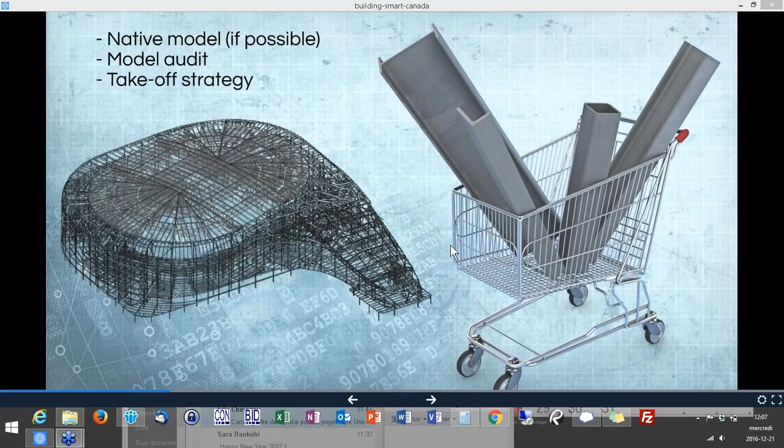Let's continue. So in sales and estimation, whenever it's possible, we like to receive a model from the engineering firm that has worked on the design. And what do we do with these models?

First, we do a model audit. Is this model good enough for estimating? Is this model good enough to start working on the job? We have prepared an algorithm that we use to define the quality of the model, because every engineering firm has different degrees of competency using those models. So we can't just close our eyes and say, well, we're going to use it anyway.

So once this is done and we realize that the model can be used, we are able to make a quick takeoff directly from the Revit model or the Bentley model, or whatever software was used to create the model. The goal is to go through the model and make a purchase of material as fast as we can.

On this specific project, the Ice District Arena, the design wasn't complete, and the opening date for stadiums and arenas, our ecosystem where we work most of the time, doesn't change. There's the expression, the show must go on. So we have to do whatever we need to do to open at the right date.

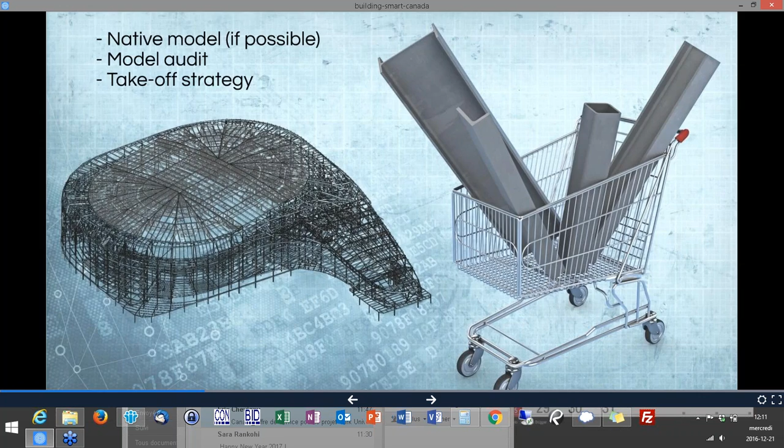The other side of BIM that we use for sales and estimation is doing some animation work. We need to prove to customers that whatever we'll be doing, we'll be in control of it. Over and over again, we were asked to provide that level of control when we pitch the job. What was extra 10 years ago is now almost mandatory. If we don't show up with this kind of animation and knowledge about the job, we'll probably be rejected from the start.

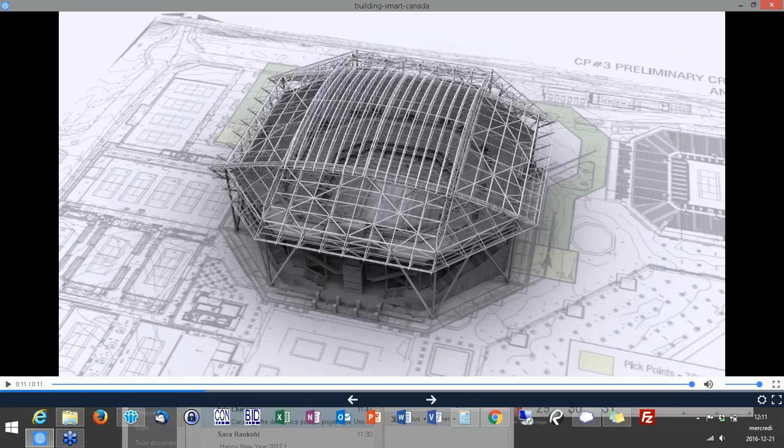This is a big change over the years. The first example was to show how the mechanism would work, and this one was to show how we intend to use the very small space we had on the job site. Most of the time they're schematic plans, but they still show our strategy to make the project work. It's a good way to communicate with the customer how we're going to use the information from engineering and how we understand it, making sure everybody's on the same page at the end—because using BIM, most of the time, is just to make sure we are all on the same page.

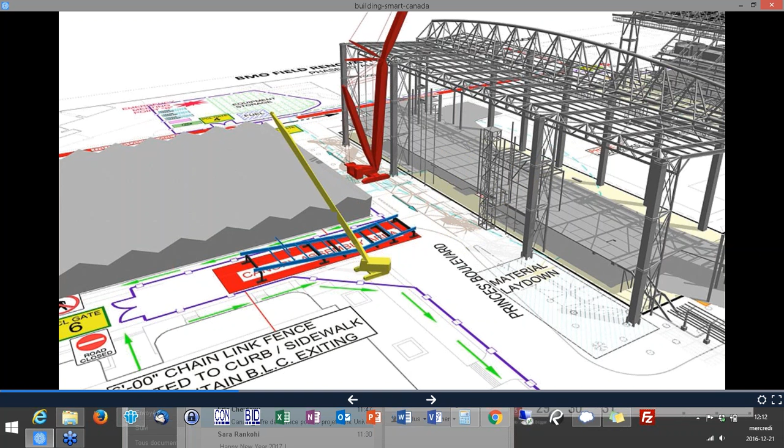So that's pretty much it for the sales and estimation. I'm really making an overview right now. I'm not entering into too much detail, but if you have more questions, don't hesitate to ask them at the end.

So now for project management purposes, using the model to create information-rich parametric elements is what we do on a daily basis. I showed you a quiet river earlier on, but the way to achieve a quiet river is to work on the sources. Different sources are all flowing into one big river at the end, but the main one remains the 3D model. So we share the mentality that we need to be perfect at the source, so everyone can work with reliable information later on.

So we use the model to put all the RFIs, the extras, the change orders, the status of production. We go from the moment the member is inserted into the model all the way to install at the field, and we can rely on this model to tell us exactly where we are on each piece or on each assembly on the job.

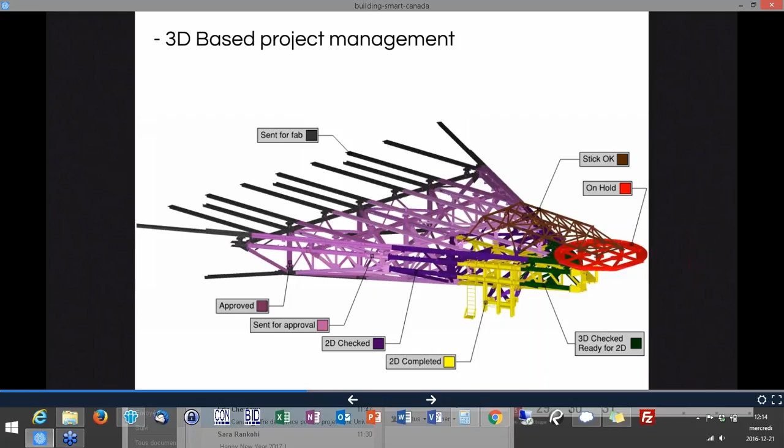So we can provide the customer with a progress report by division, by type of member, by whatever he needs, because all this information is inserted member by member. So we can then make any type of group that we want in order to show where we are at any given time.

We also use those models. This is the ICE District again. We have used the 3D model for coordinating with other sub-fabricators. Sometimes we take the package for everything that touches the steel, but other times, like for the ICE District, we had to coordinate with the membrane fabricators without any contractual obligation. But at the end of the day, we still had an agreement with them that it would be better to coordinate using those models with or without a contract, because that's the best and probably the only way to do it accurately.

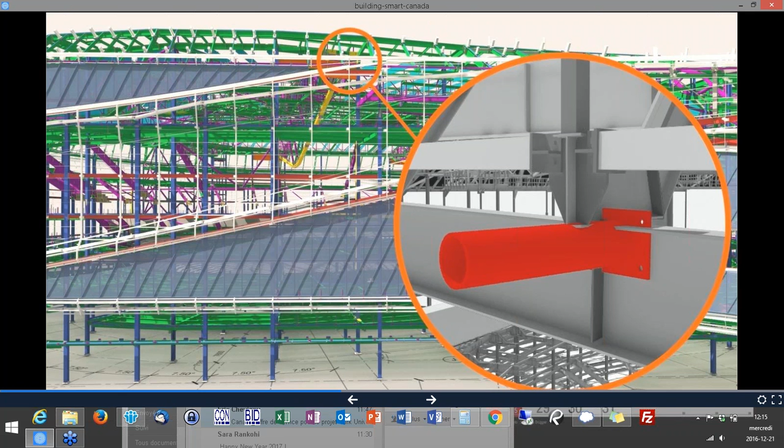So we work with different software. Navisworks is one of them, but we work with different software to make sure our models are clash-free with anything that touches our steel, because that's the limit of our products. We work with the steel, but we also work with all the surrounding products. We can't close our eyes because we come first and the others will adjust. We need to think about everyone that will come in just after us to install their elements.

And sometimes this even applies to our own company. Canam Group works on many different steel products, and the drafting teams are different from one product to another, and for technical reasons we use different software to achieve the drafting. The reason is that no single one can do everything, so we do part of it in Revit, part of it in Tekla, part of it in SDS2, depending on the product we're selling. But our approach is to sell all of them, if ever possible, at the same time, so we can't afford to go to the customer and have clashes between our own elements on the field.

This would look a little bit foolish - we can't even coordinate our own product. So we make sure that any product is brought to Navisworks, and then make sure it's clash-free before it's produced at the different facilities we have. So as you can see, the applications are mostly internal from that side, just to make sure we deliver the best quality product at the end.

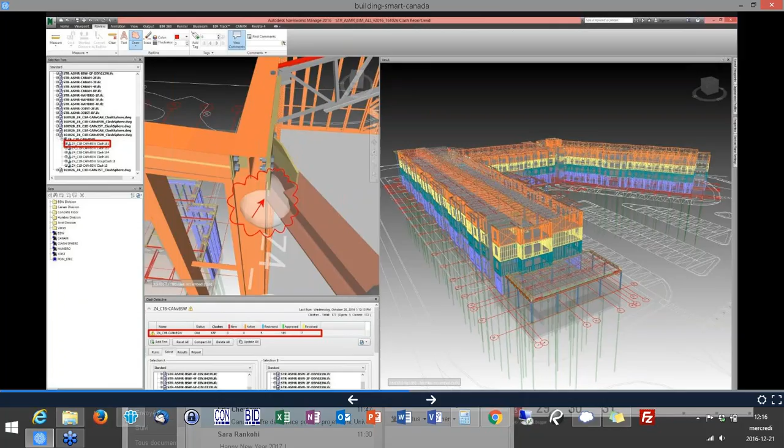Now in the shop, that's maybe the least known application, because you don't see that too often. I'd like to show you some of the applications we do in the shop.

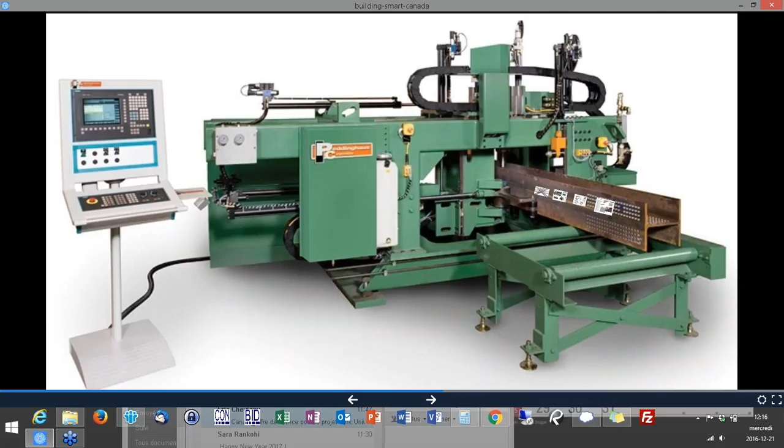This is a CNC machine, for those who don't know what it is. This machine has been eating our model for maybe 20 years now. And this is the main reason why, as a steel manufacturer, we have been so involved with 3D modeling early on, while everybody else has been joining the BIM movement maybe for 5 to 10 years. Canam has been using a 3D model to feed their CNC machine for over 20 years now. We have been lucky enough to be brought into this early on, so it's a good thing for our industry.

So one application is to be able to work on those big nodes. It's not always easy to find the best and most economical way to build a node like this. So we use an IFC file that we export, and we put it into a BIMsight, so we can make a quick animation to show in which order the shop personnel should install each element.

The drafting team just produces the BIMsight model, and then the shop itself is able to work with the file and create the animation piece by piece to make sure it's assembled in the right order, and that we save as many shop hours as we can.

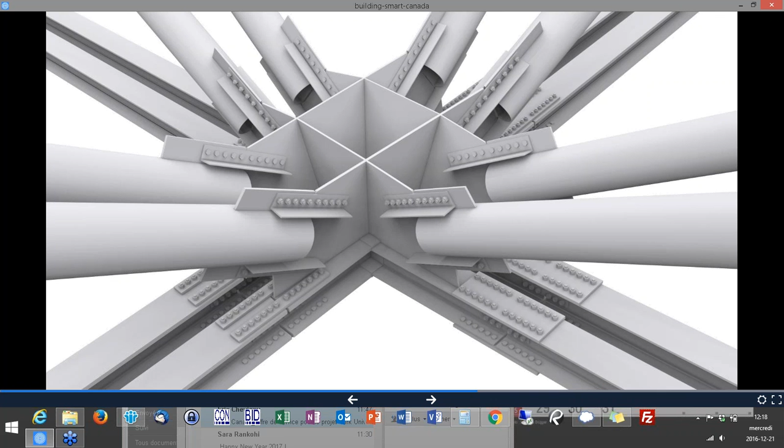We also use laser scanning in order to do quality control. Some projects we work on have assemblies so complex that using traditional tools, we can't make sure the elements have been fabricated according to requirements and within tolerance. So the shop guys were basically telling us, well, I think it's good, but I can't tell you for sure. So hopefully it's good. When we reached that conclusion, we decided to include some laser scanning within our own shop.

Where most people use laser scanning to acquire existing conditions, we use it to verify that the assembly has been produced exactly as per the theoretical model. So basically we scan, then we clean up the point clouds, and then we overlap the point cloud over the theoretical model, and we give a color gradient to show the delta between the points and the theoretical model. That helps us find out where the models are not exactly aligned with what they should be.

So there are some limits to this process. One of them is cambering, or elements that are not very rigid. We have a hard time making sure we don't have false positives, meaning the piece has been scanned one way, but it was in that condition in the shop because it was not fully supported. So the point cloud is a bit distorted, and then we raise a flag, but at the end there was no production mistake. So we're still experimenting with the best way to use these technologies. There's some very good applications, and others that are maybe less interesting, but we'll pursue our research on these technical tools.

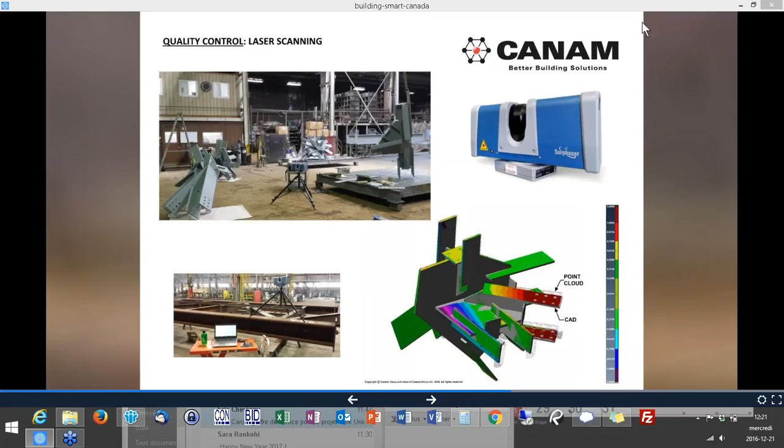One other application is, like I told you, if we have a great 3D model, we can use it for many purposes. One of them is to plan how we're going to transport the elements from the shop to the job site, using the 3D model and knowing exactly where the center of gravity is and what volume the steel occupies in space.

It helps us plan which flatbed is going to be used, and whenever we need to go out for permits, providing the different government agencies with these kinds of diagrams is a no-brainer for them. They see these guys know what they're talking about, because they're actually showing me in 3D exactly how the elements will be put on the truck. That helps us a lot.

One more thing we do is the moment the 3D model is completed, we know exactly the size of each assembly. So the transportation or logistics team can challenge the engineering team regarding assemblies that cannot be transported. Before that, most of the time we had to wait until the shop drawings were fully completed to realize that a specific assembly could not be transported from point A to point B for different reasons, whether it's too heavy, too large, or it requires an escort.

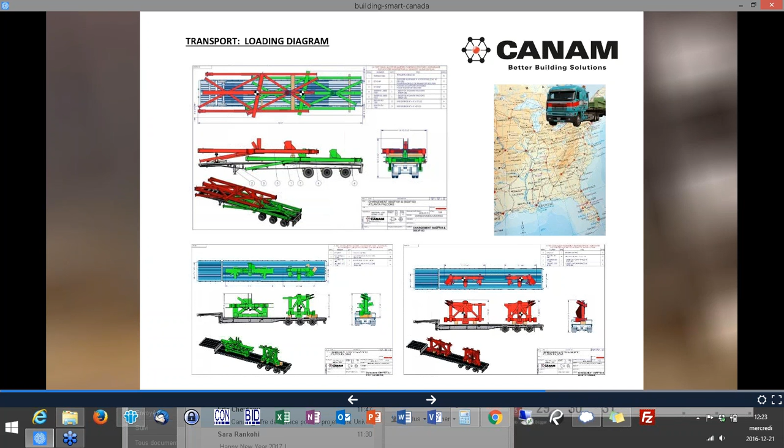Another example, from the Ice District, we had to transport all the steel by train freight. This helped us save a lot of money. We used the 3D model to plan the loading of each of the containers to make sure it's as efficient as possible, using the most space allowed to transport it. This is one very good example of how we can use BIM and information regarding the members in a 3D world.

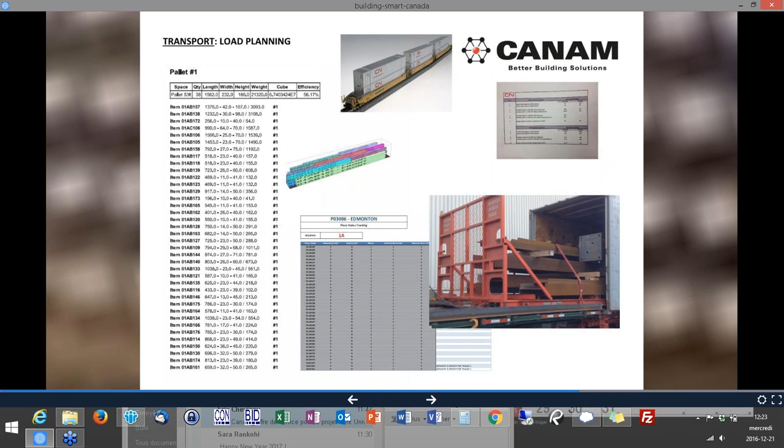Now, in the field, some example again: site logistics and 4D planning. More and more, we're being an erector on the job we fabricate. So being able to use some simulation, crane simulation, to plan where and when each crane will be moved, where it's going to be at what specific time, where we're going to place the steel on the job site, really helps us save time and money, because it's not a random thing that just happens. We try to plan it as best as we can.

The downside of this process is we haven't been able to automate it. So whenever the schedule is changing, in a very ever-changing scheduled project, we have a hard time adjusting this model in a dynamic way. We need to do that manually, and it's very time-consuming.

For other projects where there's very few schedule or design changes, we're able to do that early on and define our best possible schedule, so the field is actually driving the need for production. We know exactly in which order each piece will be produced, when it's going to be shipped, where it's going to be dropped on the field exactly, and where the crane should be at that specific day, and if it's not, why isn't the crane at the specific place at that time. So this is something very useful that we've been using over the years.

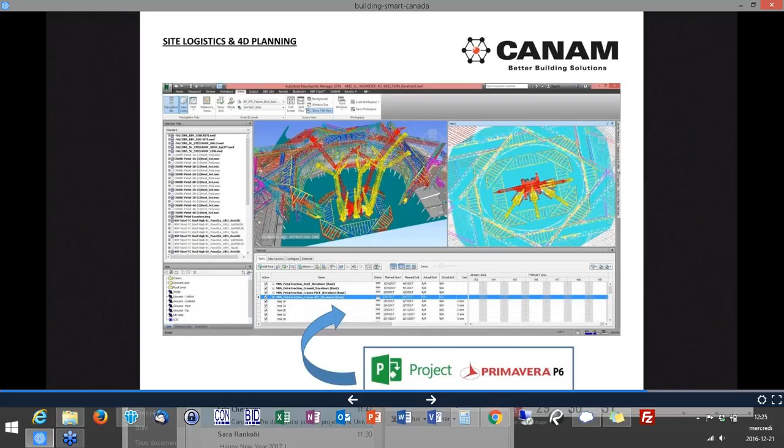Still imperfect though. Still a lot of work to be done on that side, but we're confident that we can add some automation in the future.

We also produce some weight reports, giving the shop personnel very precise information about each assembly. It's for the same reason the shop guys want to know how to assemble it. The erection personnel want to know exactly what each assembly is and how it's going to be loaded the best way. How do we assemble three of them on the floor? How much, how heavy is it going to be? Where do I pick them? Where's the center of gravity? This is all information that is like gold for the erection team, and we try to provide them that precise information as much as we can.

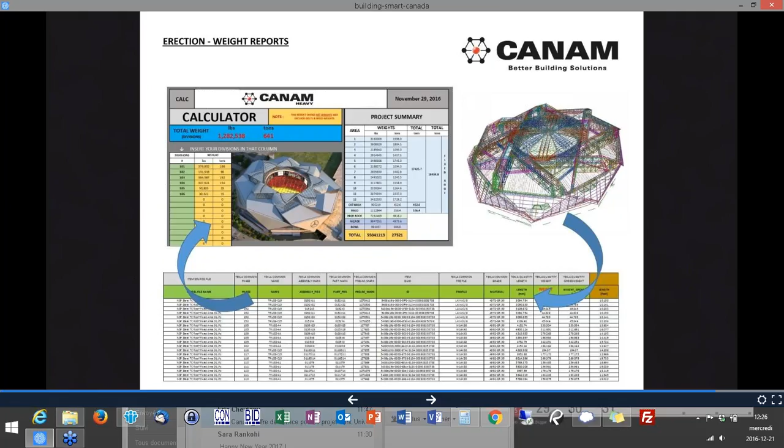Now, regarding sharing, I was asked to talk a little bit about how we use open format in our daily activities. Basically, we're able and willing to share our model because we believe it's the most accurate model. We reach level 400, for those familiar with LOD levels. Being able to share this precise information with every other team on the job site and every other actor on the project, we believe it's very interesting.

So what we actually do is make an automatic publication. Some of the jobs we work on have like 10 to 15 different Tekla models for the production of the shop drawings, so we're able to automate this publication. It's weekly, and it all ends up in Navisworks or in IFC format, depending on the needs.

The interesting fact about this model is it includes all the sources. When I talk about sources, we've been talking about the Tekla model, but the other sources we use are P6 for the schedule, our manufacturing software for production follow-up, and SharePoint for document control. All of these platforms are sources that are all linked together in that federated model, which we can provide to the project team automatically every week.

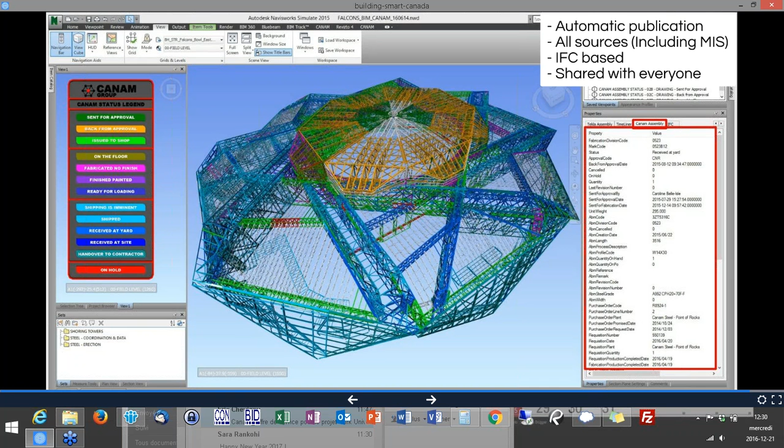On some projects, we've published this model on 4 or 5 different platforms. I have to say it was not very efficient, but there was no unique platform defined by the customers at the end, so everybody was trying to pull the blanket to their side. We were just like, okay, you want it that way, let's do it that way. So we tried to facilitate the sharing of this information, coming back to this river that we want to be as smooth as possible, not only from the inside, but also for our collaborators on the project.

So that concludes my presentation. I hope you learned some interesting, cool facts about how we really leverage BIM and 3D models to create better quality steel construction jobs. From this point on, I'm willing to take any of your questions.